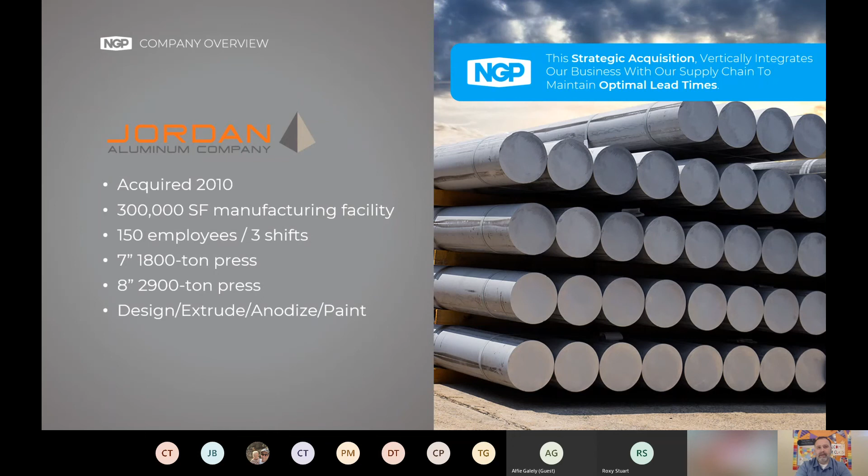which gives them a very unique advantage over other manufacturers on the same platform as them. And it kind of makes them second to none. They are able to design any product. They can customize anything for you, and they can do all of that without having to get rid of the great lead times that they offer.

They're a family-owned business and operated. The benefit of that is they take it personally, not only with how they interact with their customers, but also how they present themselves to you via sales rep agencies, and also through customer service and putting their product on your job site. They are a service business, and they exist literally to serve their customers.

Anything that is requested of NGP, it's pretty hard for them to say no, whether it be an expedite request, whether it be a customization request, whether it be a solution that no one else has an answer for. These guys are willing to go out and make a difference by trying to innovate and design around any problem that's out there. They invest in their business, not only through their people or their operations and technology, but also

their products by bringing new products to the table. Different offerings such as sliding hardware, pocket door hardware, changing the way that people are putting those products on the shelves, by overloading with the parts that you may need but not know that you need, being able to lower the SKUs that you have on your shelf.

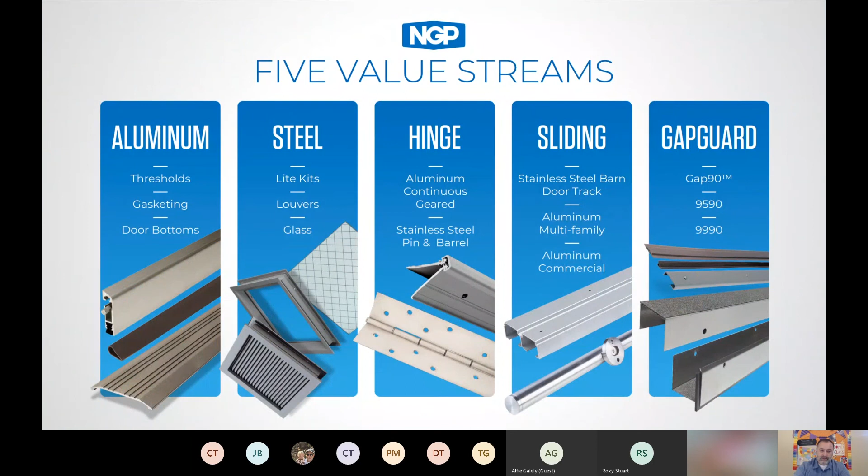So some of their older stuff - back to the value stream, aluminum. Some of the old stuff they have: thresholds, gasketing, door bottoms - that's part of the overall, but something you might not have known about is they also do specialty products. We're not going to go over every one of the specialty products because we don't have all day - everybody has a job and we need to get back to work.

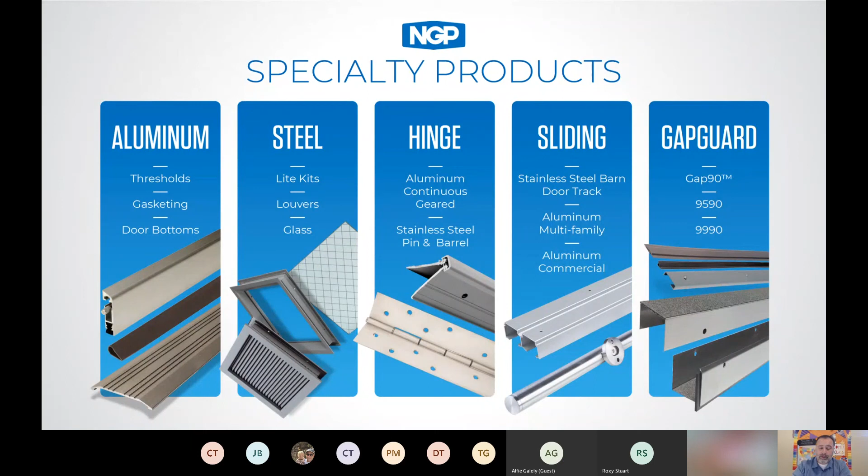But keep in mind that these guys do offer things that can really put you ahead in the market, such as finger guards. NGP, the spring that they use in their finger guard is top notch. It's not a cheesy piece of plastic like you find with other manufacturers. They do have a plastic model, but it's better. They have an aluminum product, but it's better.

So in schools, child development centers, and hospitals, where customers are pinching their fingers and things like that, finger guards are a really big benefit. They also offer flood shields - I think we had a flood in Boulder not long ago, or something along those lines, and flood shields at doors can help with these sort of things. It's not very prominent here in our area where I live, but they do offer things such as flood shields and finger guards that could help on a day-to-day basis.

It's the coating that they put on the threshold that everyone has become familiar with since the 80s. But it's a finish that is better than what you find with some of the other manufacturers.

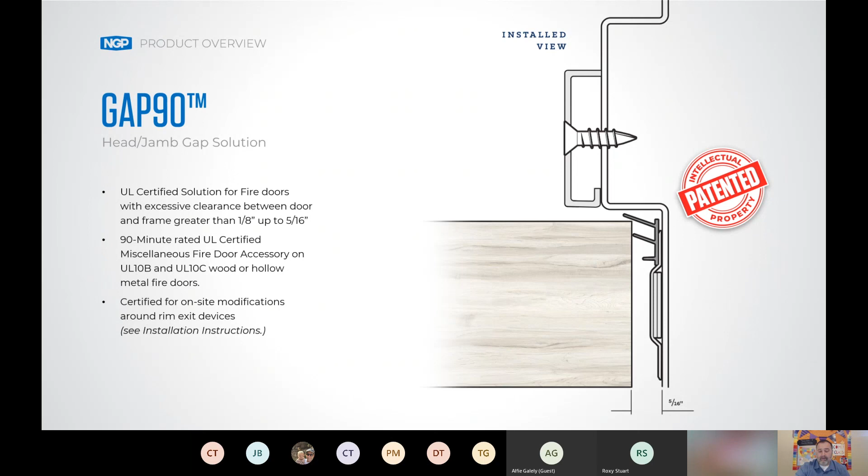But looking at the 9590, we'll go back and forth here. Look, with the 95 or the 9990 at the head of the door, as I stated before, these guys noticed that when installing the Gap 90 solution, the portion of the installation that goes on the soffit of the frame was interfering with closers, the installation of the closer arm. So instead of making you work around that closer arm with a product that wouldn't work and wouldn't be rateable, they just invented this product.

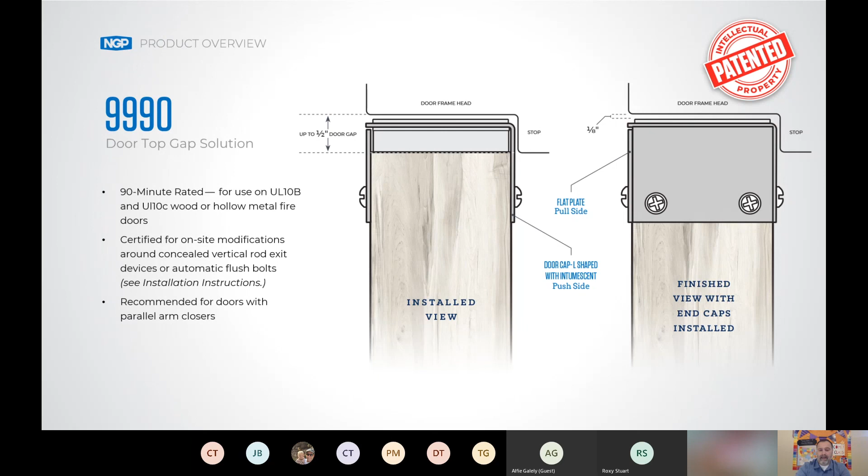And instead of only covering a 5/16 inch gap, once they created this product and got it patented, it's now able to cover a gap up to 1/2 inch. So whether your door is slightly slanted or you just have a frame that's out and no longer meets compliance, this can now move that door with the help of this intumescent and this gap channel. It can clear a gap up to 1/2 inch and put it back into compliance.

The same thing with the 9590, covering that gap at the floor of the door. The maximum gap for a fire rated door from NFPA 80 is, I believe, 3/4 of an inch - you may correct me if I'm wrong there. This will accommodate a gap up to 1.5 inch maximum. So if you have a door with a 1.5 inch undercut, this can accommodate for that. Again, it's 90-minute rated, for use on UL 10B and UL 10C wood and hollow metal fire doors.

You can modify it on site. So if you have doors that need to be cut down - if it's too, you know, a door that's 3 foot or 2 foot 10 instead of 3 foot - you can cut it down. You can modify it and make it accommodate for that special size.

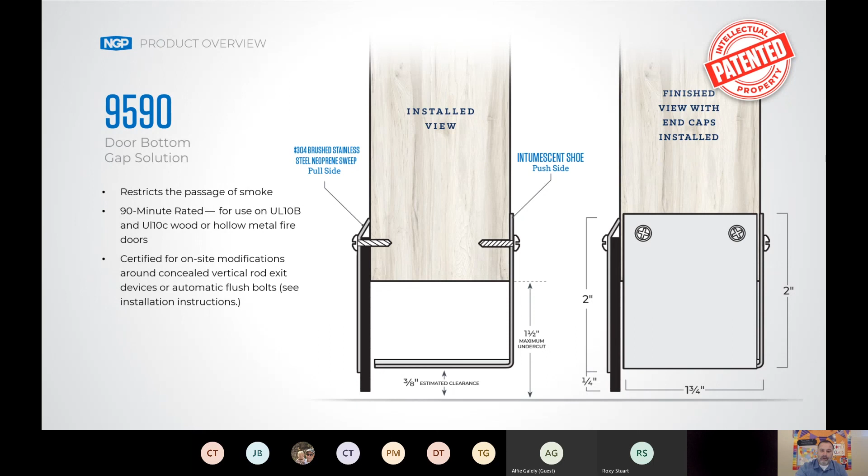With this, you get the end caps. You'll need to install those, but it creates the seal for that solution. Once heat is on this door, that intumescent that's inside here, you can see it at the bottom of the C channel, it will expand and cover that gap, allowing that door to meet those ratings.

So some of the accessories that will come with the gap solutions, the door gap gauge. If you're on site, Dave Thielen and I know this because we were recently on a site looking at some of the gaps that are in some of the doors in hospitals. You need a gap gauge to tell a customer, or to show a customer, that they are either in compliance or where they're in compliance, and also show them where they're out of compliance. The door gap gauge will allow you to do that. It will come with some hinge shims, through bolts, strike shims. So that being said...

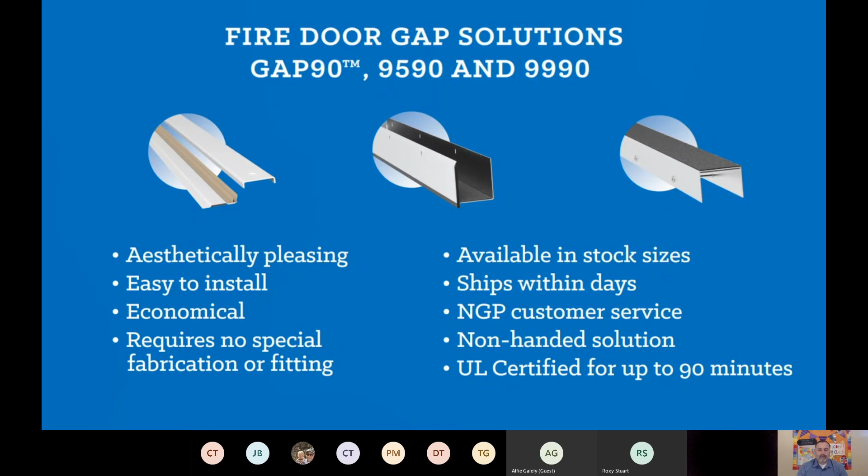Gap Solutions, to me, is a very innovative and creative way to help customers change the way that they normally look at a fire rated door. And as boring as it may sound, giving a customer the ability to create a solution to an opening in a hospital that they may have 600 fire rated openings or more, be able to create a solution that is not only economical, but also time saving and also labor saving.

It's a great benefit to a customer, and it allows them to change the way that they normally look at fire rated doors and just being a problem child for whenever Joint Commission comes, to something that they can easily solve and easily move past in order to be recommissioned and change the way that they process themselves in a hospital. And they can take that money and use it in other areas, especially in areas that we all work in, as far as door hardware and that sort of thing.